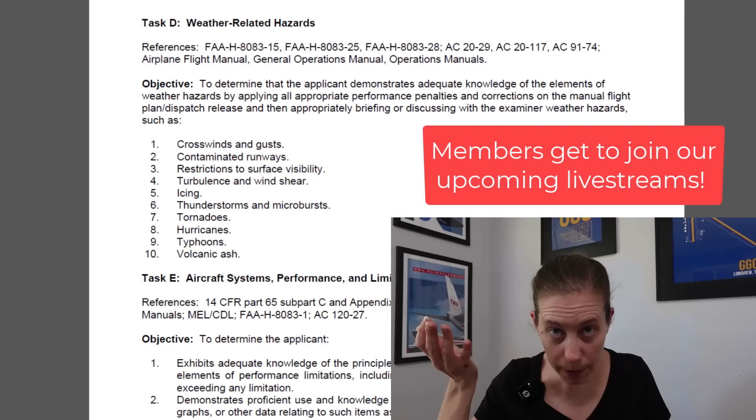On to this topic, task D. The last one I made in this series was with a specific flight scenario. This time I want to talk about some specific questions, just the theory behind these areas that the FAA has in the FAA Aircraft Dispatcher Practical Test Standards. So without further ado, let's get started with talking about crosswinds and gusts.

What are some conditions where you would expect there to be strong gusts as an aircraft dispatcher? Sometimes when we expect gusty conditions is where we have a cold front approaching or gone through the area, which can bring gusty winds from an immense quick change in pressure happening in a short period of time. We can also expect gusty winds if we have a strong surface wind, but then obstacles such as terrain or even buildings or hangars near the runway result in gusts and variable direction winds on takeoff or landing.

You also, of course, have thunderstorm potential activity. We can cover thunderstorms in greater detail. Sometimes gusty winds are a result of a sea breeze or land breeze, where we have a cycle of air flowing either in from the sea or out from the land, depending on the time of day. This is common in more coastal areas.

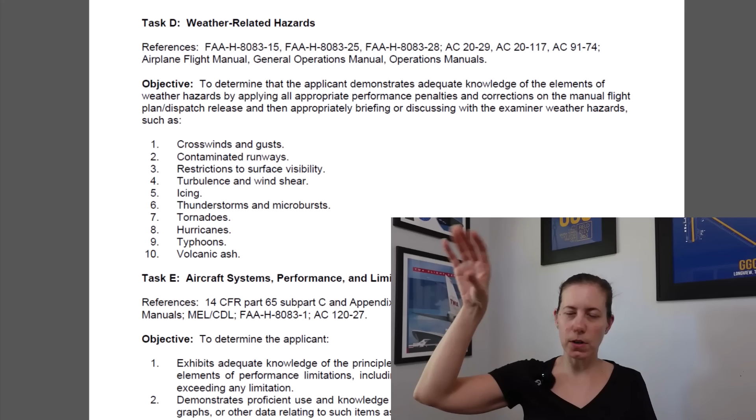Okay, what is a hurricane and how do those form? Okay, so hurricanes are huge areas of low pressure. They tend to form in the US areas or in the Gulf and this part of the world anyway. They tend to form June, July, August, September, October, November. Very rare to have them in December. They form in areas of tropical disturbance off the coast of Africa.

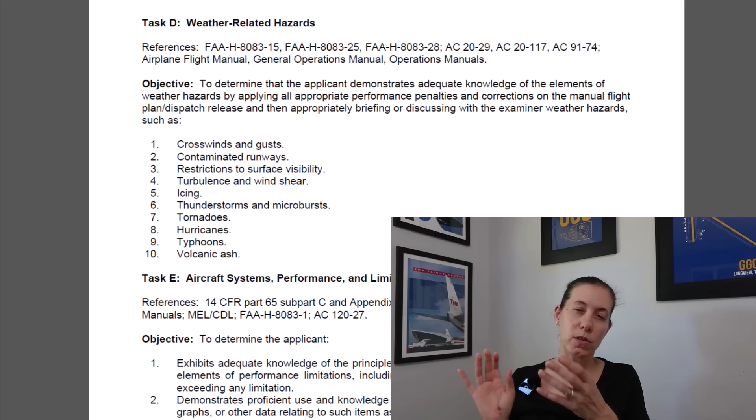When the water is very warm, they typically will move slowly as a tropical depression area across the Atlantic, moving westward. As they go along, sometimes conditions favor them becoming up from a tropical depression, which is a low pressure, to a tropical storm, which basically is more wind and more low pressure. And once they reach a certain amount of wind speed, they get classified as a hurricane, which has a very low pressure in the middle. But it's basically a very large rotating low pressure.

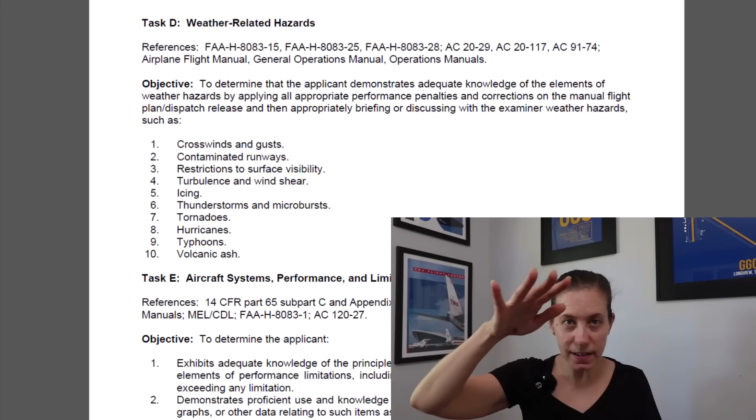It has bands of thunderstorms that come out from this eye. The eye area actually is clear. Doesn't mean you should go flying through that, but these bands of weather come out from the thunderstorm and cause all kinds of hazards to people and aircraft operations, from bands of thunderstorms, which can spawn tornadoes, frequently do. We have storm surge, where basically the water rises suddenly up on the shore because it's basically coming up with this hurricane movement. Of course, very strong winds. We're talking about like 165 knots or greater if it's a very strong hurricane, and all the associated things with high winds. So yeah, hurricanes are typically the late summer, fall time of year in the United States.

So what is the difference between a hurricane and a typhoon? Actually it's just about where they're located. A hurricane is what they call them in the Atlantic, but a typhoon is something in parts of the Pacific Ocean. It's still a large, low pressure, organized storm system that lasts for days and has movement, causing lots of chaos. Thankfully we can see where they are with satellite, and we have the National Hurricane Center that does predictions and evaluations. But yeah, that's a typhoon — it's really just a terminology difference.

Okay, and lastly, volcanic ash. We talked about volcanic eruptions and how you'd know they're happening, but why is volcanic ash a problem for aircraft operations? Volcanic ash is interesting — it's not really weather, it's a natural thing. If we have a volcanic eruption, we end up with something that looks like a cloud, but it's not a cloud like you'd expect. It could have steam, but also in this cloud we have particles of sand, ash — little rock particles that are getting spewed out of the volcano.

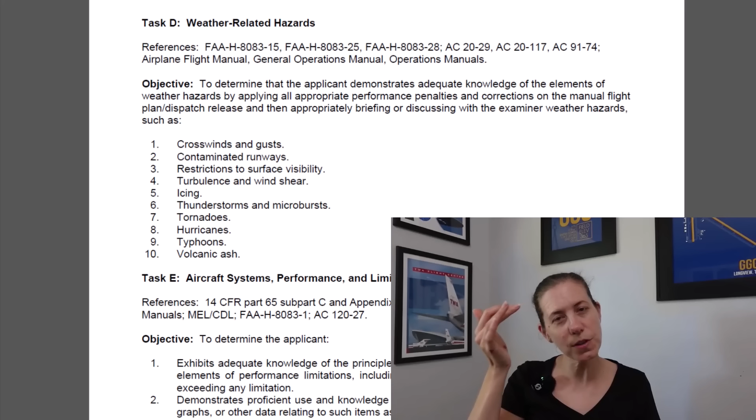You also have the problem that since you're flying through basically a cloud of very fine particulate material, it sandblasts the aircraft, and it can sandblast windshields and windows, making it impossible for the crew to see out of the aircraft when they come in to land. So yeah, it's very bad. It's also hazardous to ground operations — it can settle on runways and taxiways, gets blown around, recirculated, and sucked into engines that way. So all of this is very bad for aircraft operations.

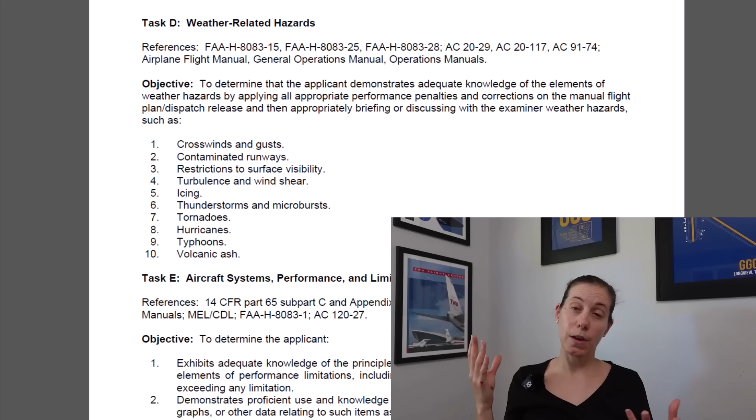So how do you avoid this kind of thing? Really it's using volcanic ash warnings, knowing where it's happening. I mentioned SIGMETs multiple times, but a SIGMET would be issued for a volcanic eruption. They provide predictions of where the ash cloud is happening so the aircraft can avoid it. Satellite views can help us avoid it, but it's not something the crew can detect on their onboard weather radar. And if it's night — this is why it's hazardous to aircraft, and how these aircraft accidentally flew into this area — was at night. There wasn't a good reporting system, so they didn't know what they had flown into, and the engines just started flaming out. Now granted, this was in the 80s, and we've gotten better at reporting and disseminating information about volcanic eruptions, but that's kind of a mini history about that.

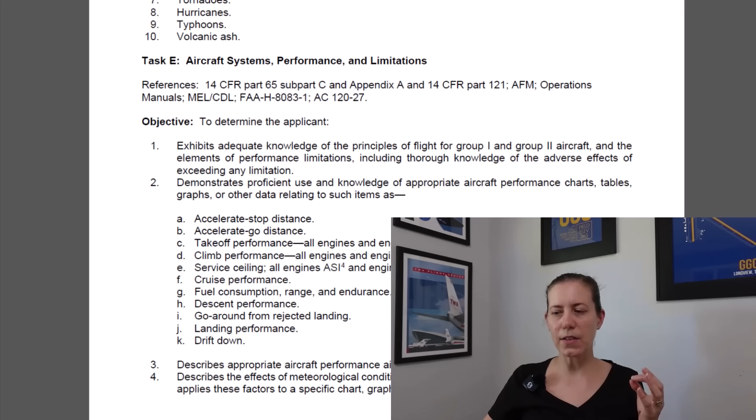Okay, so we covered a bunch of different weather-related hazards. Hopefully that's helpful to you guys. The next video, when it comes out, is going to be all about aircraft systems. I'm definitely going to be doing multiple videos about this because, yeah, commonly asked questions. And then eventually, there's so many areas on here, it just keeps going and going. So I don't know how many will be in that series, but stay tuned.